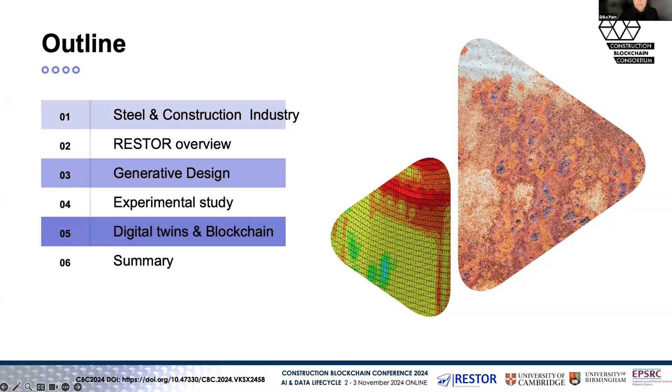The steel industry already significantly contributes to greenhouse gas emissions. Although most steel is recycled in the construction sector, very little is actually reused. Typically we recycle up to 93% of our steel, but in terms of reuse, only between 7 to 13% of this is reused in construction, which means there's a huge gap. There's potential to reuse more steel in new built projects, particularly in commercial developments and industrial buildings. So that's what we focused on.

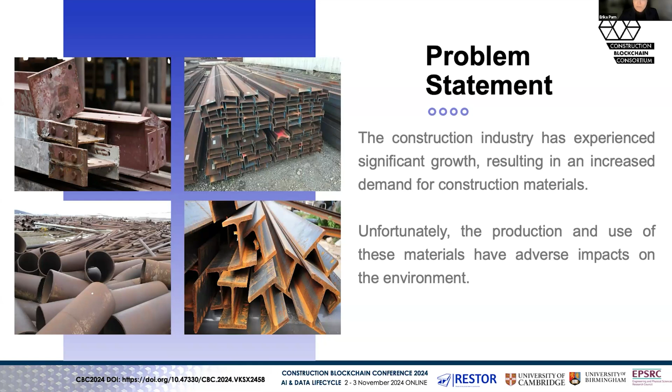It's really targeting the iron and steel construction sector, which is currently the fourth largest global CO2 emitter, about 2.6 gigatons estimated in 2019. The way we've chosen to tackle this is through digital information management, digitally twinning steel members and their performance over lifetime.

It's really a combination of two domains of expertise: University of Birmingham with its expertise on non-destructive testing of materials and digital twinning of steel members and their performance over lifetime, and combining our expertise from Cambridge, from the CIT lab, to translate those digital twins into new designs of industrial and commercial buildings.

This is a research initiative funded by the EPSRC. It's valued at 1.3 million. It's a collaborative effort over a 3-year-long journey. We're now in the last year of this project together with the Birmingham team.

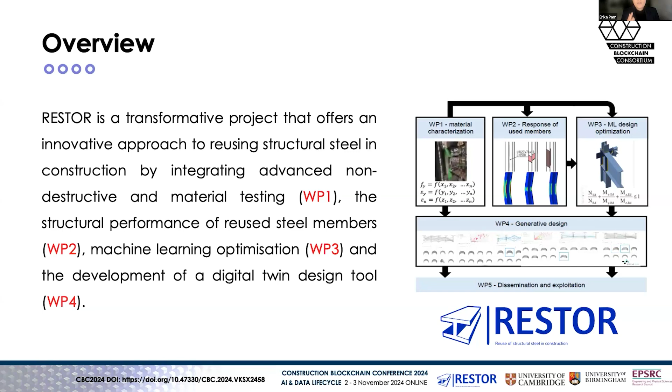A key outcome from the Cambridge side is to help develop this web-based design tool that can be harnessed by structural engineers to embed reused steel members. But it has potential to also involve steel suppliers. We think that although us as researchers develop tools up to a certain level of technology readiness, a big gap we see in the market is the business side and business model, helping construction steel suppliers quickly capture their stock of reused steel materials and connect that to designers who are designing new industrial or commercial buildings where those reused steel members could already be incorporated at the early design stages.

The RESTOR team from the Cambridge side comprises Professor Ioannis Brilakis, who is the principal investigator from the Cambridge team side, myself, and Dr. Soheila Kookalani. She has been doing most of the great efforts that you'll see today around generative design.

The Cambridge team has really spearheaded the development in this project on using and integrating BIM into the seamless inclusion of reused steel components for the design of new industrial, residential, and commercial structures. Whilst the Birmingham team is focusing on the actual digitization and testing of existing steel frame components, creating a catalog of steel beams that we can then use and test in different types of scenarios. Here's a quick overview of some of the work that the Birmingham team is leading.

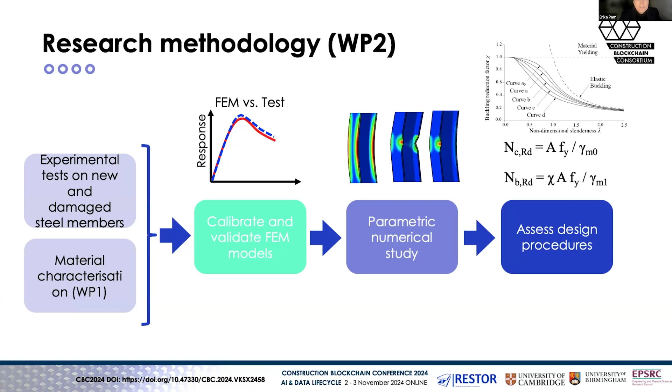So really what the Birmingham team is trying to do is characterize the steel beam materials in order to align what is being tested in the real world with the simulated models, to minimize that gap. That really is the fidelity of the digital twin. We're trying to capture the essence of what happens to the steel beam members in a machine-readable format, to have as much of its performance data in digital twin format for us to integrate into the design tools. A lot of that deals with lab-based testing, capturing conditions that might already exist on steel beam components like dents, which may result from deconstruction processes, characterized by properties such as location, magnitude, and direction. All of this needs to be captured within that lab-based environment.

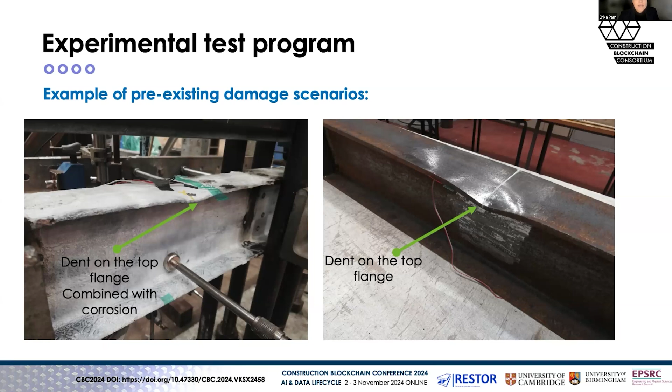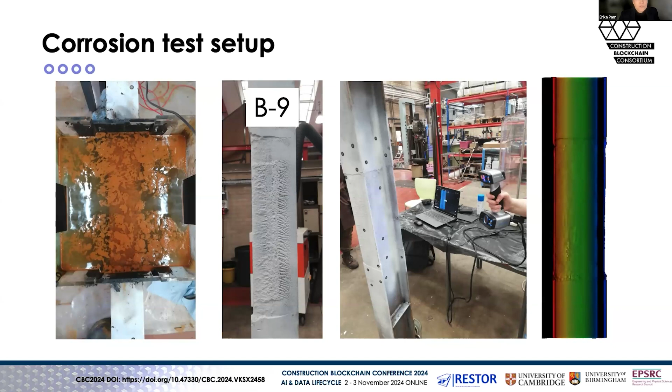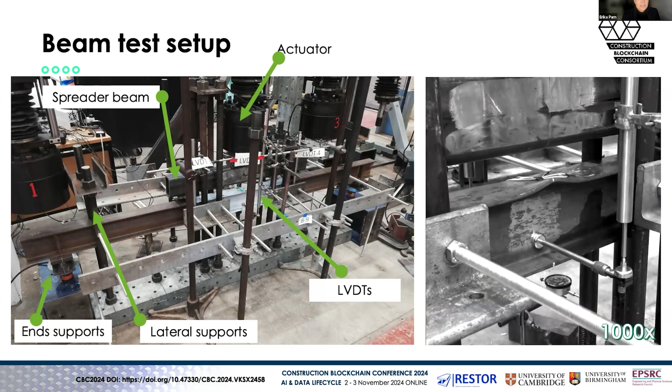They have also, in addition to these common dents, tried to capture and replicate corrosion type tests. So corrosion tests are being run and then characterized into those steel frame structures. There are different methods being used to capture the existing conditions of these steel members, as well as doing additional tests within the labs using various sensors like LVDTs. These are outside of my remit of expertise, by the way. This is what the Birmingham team has dedicated the last 2 years to, doing a lot of this lab-based testing.

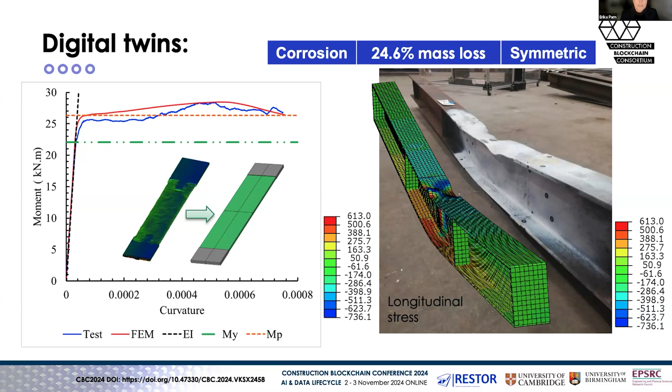But in essence, what we get to is a digital twin of the beam. We want to get as realistic a characterization of that beam's load capability as possible, in order to embed that into any future designs. So a critical part of what the Birmingham team produces is a better understanding of the characterization of these steel beams, so steel suppliers have better confidence in assessing whether or not those steel beams can be reused. A lot of that assessment still happens very manually, and as a result, a lot of steel is discarded as non-reusable.

So where do we come in? The Cambridge team comes in, especially on the generative design tool front. What we want to do is take this catalog of steel beam members, alongside its performance-related information and load bearing capacity data, and embed it into the design tools that structural engineers can use. A big part of that is to create a generative design tool that can incorporate different sections of those steel beam components.

For those who may not be familiar, generative design is an iterative design process that can generate a wide array of design options for designers. This could be architects, but in our case, structural engineers. This takes into consideration specific constraints and objectives that you can set.

Typically, you have 3 main components in generative design: exploration, where you explore the entire design space to generate a wide range of design options; iteration, where you do numerous iterations of the designs fitting those initially set constraints; and optimization, finding the most optimum solution for your design.

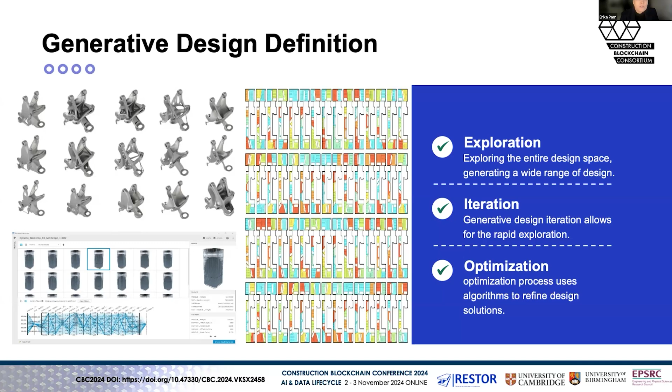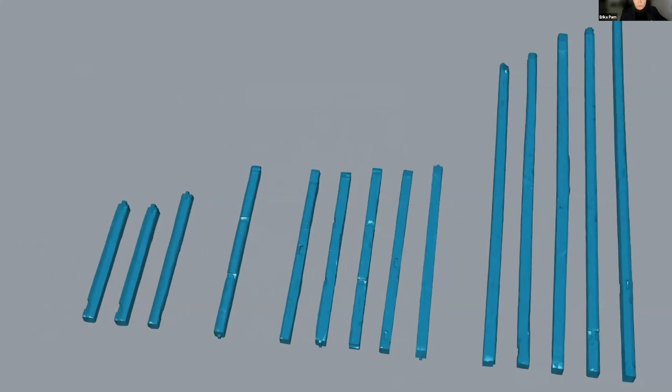So you can imagine what we end up with is a catalog of steel beam members that can then be utilized in the design of new steel structures. We have these catalogs of steel beams, we've mapped them, we've digitized them, and we now have an understanding of how they will perform. This is after deconstruction.

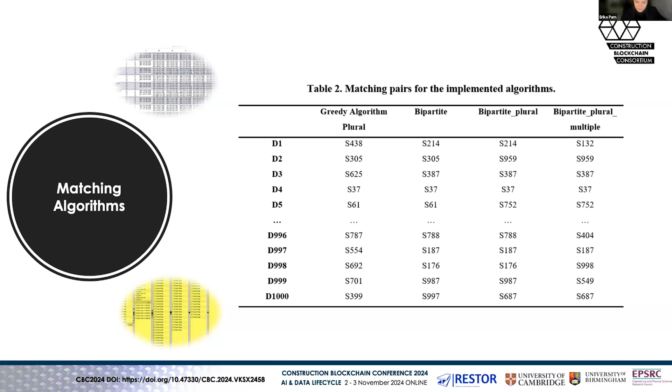We then want to match those steel beams. Our goal is really to match the demand elements with the supply elements. This goes more into the maths, but I'm not going to bore you with that. Essentially what we're trying to do is match the pairs generated by 4 different algorithms: greedy algorithm, bipartite, bipartite plural, and bipartite plural multiple. You see the elements listed there from D1 to D1000 — these are the demand elements, matched using the different algorithms with the supply elements. What that means is we are able to use a catalog of existing steel beam members and identify where they might fit into newly generated design options for industrial buildings.

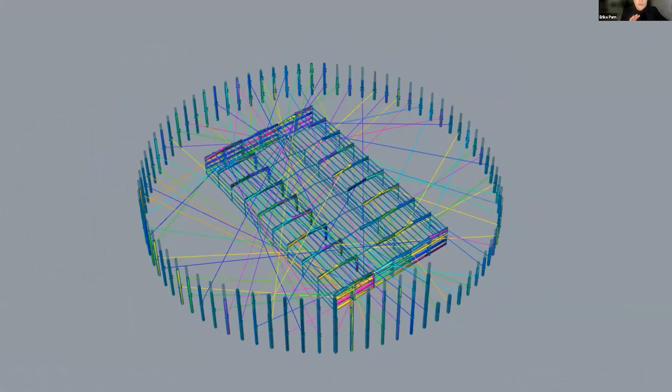So essentially what we do is combine the generative design process with those matching algorithms so that we are able to supply the correct fit of the existing steel member into a design of a new industrial building. And it's not an easy thing because industrial buildings have a very large span, so you do have to be quite particular in where you can reuse these steel members.

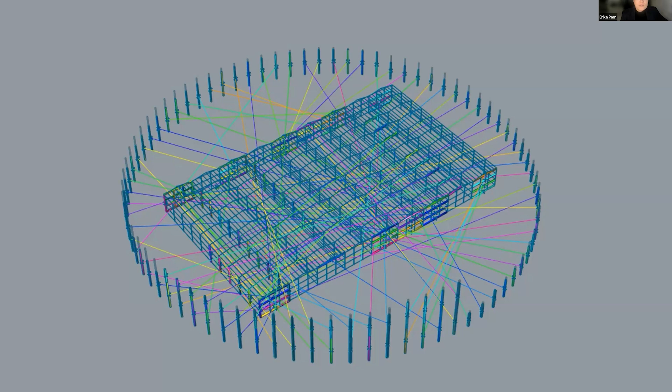But we also want to extend this not just to industrial buildings, but also commercial buildings, because most of the steel reused happens in areas such as densely constructed cities like London, where there is increased pressure to reuse steel. So what you end up with is having various different iterations of designs, but also being able to accurately match your supply and demand steel beam members.

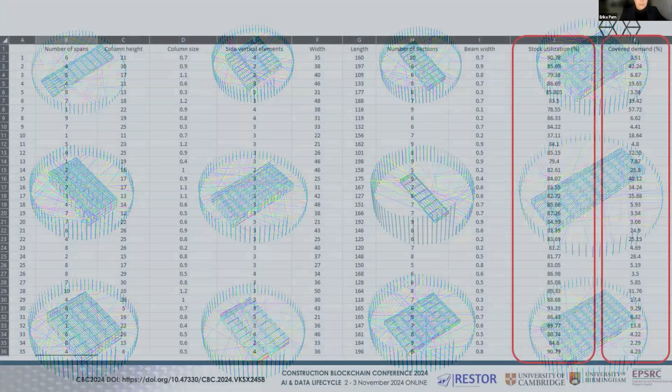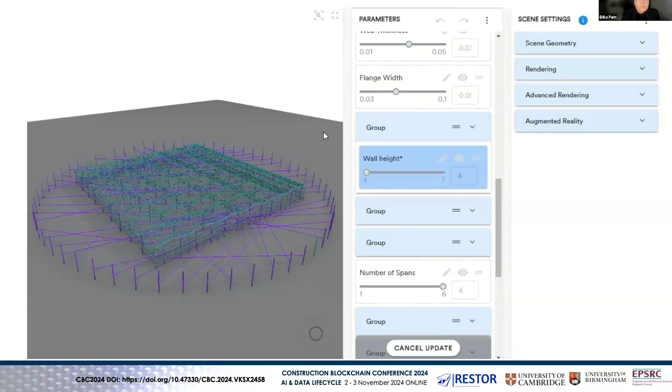Again, I'm not going to bore you with the maths here, but the final outcome is this is our initial proof of concept of a web-based generative design tool where you have an interface and you're able to modify, in this case, an industrial portal steel frame design and then match that with a set of catalog of steel beam members.

So in an ideal scenario, you would also want to potentially combine this with other information, and this is where I see blockchain in particular will have value: being able to guarantee and have a track record of the provenance of some of these steel members. Because it's not just being able to have a track record of where that steel comes from, but it's also an interesting story that many developers and building owners are interested to know where that steel comes from.

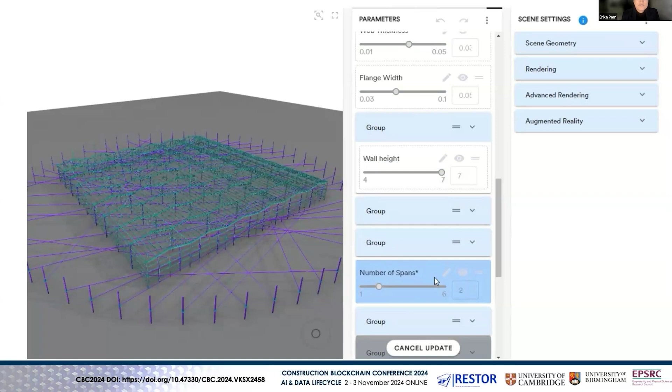It makes for an interesting story to tell if your steel beam comes from, I don't know, some older, very famous architectural gem. So provenance is really an important part of capturing the materials, where they've come from, and having that digital thread in some essence of your steel frame building.

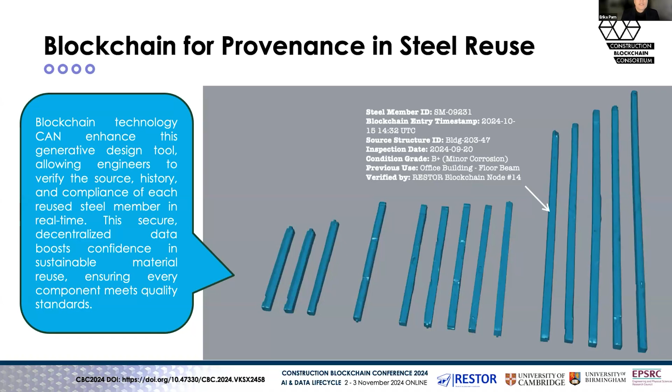So I welcome anybody to reach out to us and find ways in which we may be able to merge some of the findings from our research work, and who knows, maybe even extend it into a new research project together.